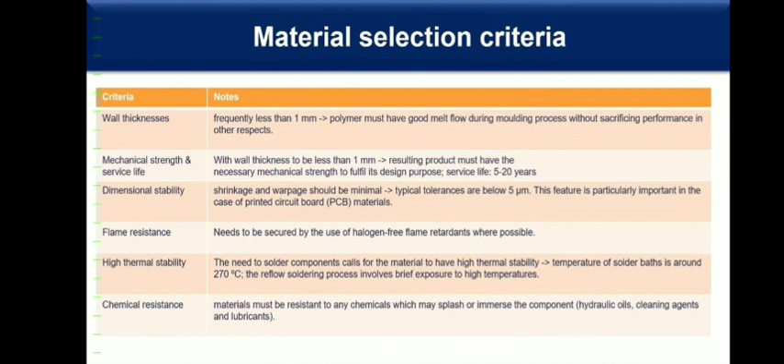Then we have high thermal stability, as already mentioned for the reflow soldering process for printed circuit boards, with temperature peaks of 270 degrees Celsius. It also needs to be resistant to any chemicals which may splash or immerse with the component, such as hydraulic fluids, cleaning agents, and lubricants.

Furthermore, there can be sliding components involved in the electrical device. If so, there should be as little dust production as possible, maintaining good tribological qualities.

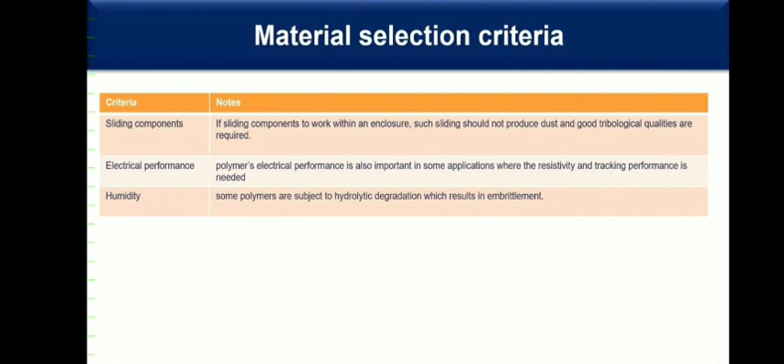Then of course there's electrical performance of the materials. Depending on the part and application, resistivity and tracking performance is needed. Also, humidity is a factor, as some polymers are subject to hydrolytic degradation, which can in the long run lead to part failure. This needs to be kept in the back of our minds.

Now let's discuss some component characteristics. When you look at electrical components, in particular enclosures, there are ingress protection numbers, the IP number. It's used to express the protection against the ingress of foreign bodies and water, depending also on the IP rating.

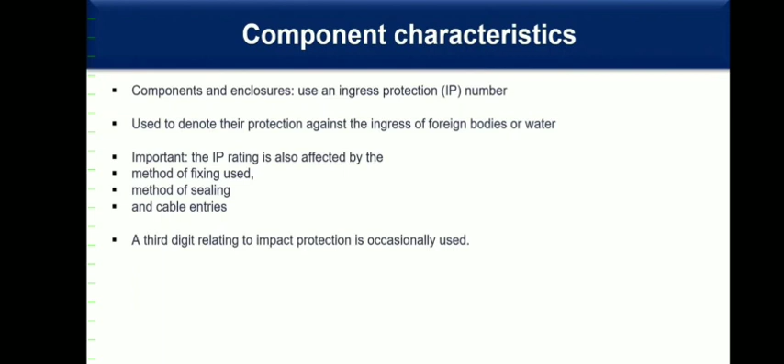Several other things are affected, for example the method of fixing used, the method of sealing, and the cable entrance into the device. Sometimes you have two digits, but sometimes a third digit is added to express impact protection. Let's have a look.

Here is a table of the different IP levels: the first digit table, and the second digit table. For example, take IP protection 66: looking at the first digit 6, that means total protection against contact and ingress of dust, and the second digit 6 means protection against high pressure water jets from any direction. This is a typical IP scenario, and you have to consider these tables for material selection.

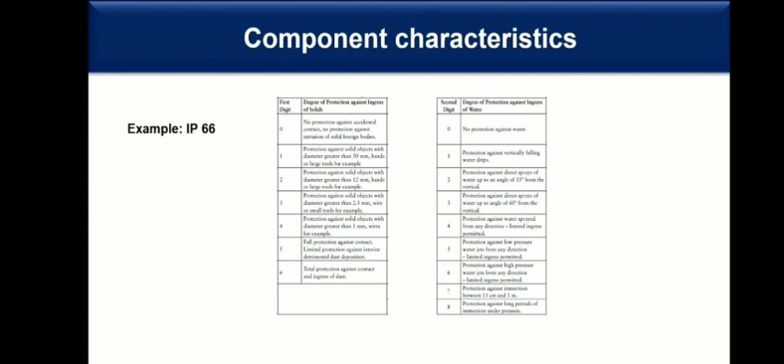Okay, let's continue with the selected materials. We start with the commodities, and here I've selected polypropylene because it's a well-known low-cost material.

We have a well-balanced relationship between toughness, stiffness, and hardness, and also some heat resistance up to 100 degrees Celsius. We have excellent resistance towards chemicals, low water absorption, and low permeability to water vapor. It's easy and flexible in processing, whether you want to mold or extrude.

Although we have a low density, this results in a variety of electrical and electronic applications. Examples include battery containers, cable retention clips, screws, nuts, and washers.

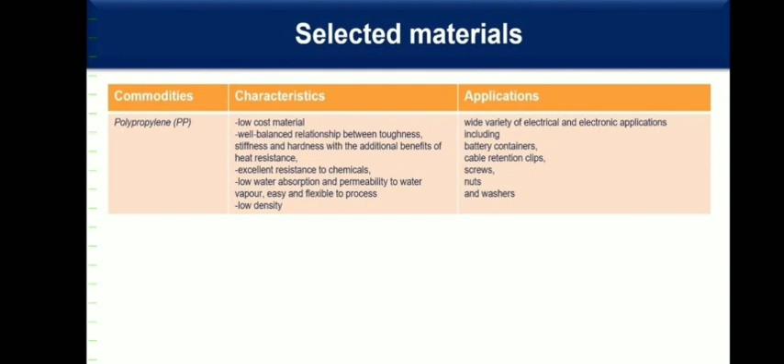Okay, let's continue with the engineering polymers, starting with ABS. Here we have good dimensional stability at both high and low temperatures. ABS can be coated with metallic finishes, for example nickel.

We have the UL94 classification ranging from HB to V0, and also excellent impact behavior. A case use example is in intricate parts, for instance.

Then we continue with polyamide or PA. It is selected for electrical components because of the good chemical, electrical, and mechanical properties of the material, combined with flexibility and relative immunity to fracture. We also have UL94V0 with the use of flame retardants, and we can withstand temperatures up to 200 degrees Celsius with heat stabilization applications.

It has a large field of applications ranging from memory connectors, input-output connectors, connector supports, board-to-board and wire-to-wire connectors, connectors in general, and also modular jacks and micro switches.

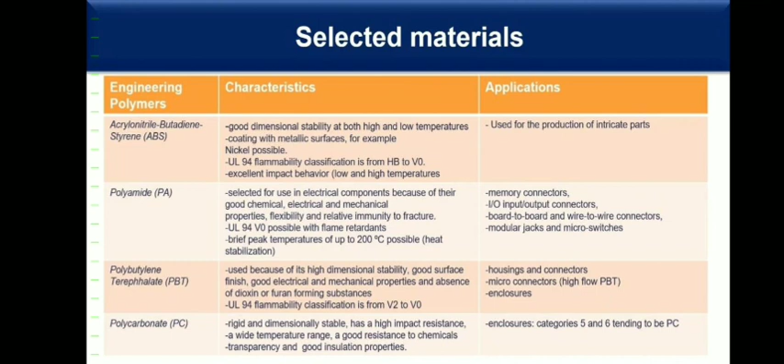Let's continue with the high performance polymers. To start with, polysulfone, an amorphous high performance polymer, which is tough, rigid, and has high strength with a high heat deflection temperature. It also has good dimensional stability with constant electrical and mechanical properties over a wide temperature range. Then we have excellent surface quality of polysulfone, which enables it to be metallized directly. Applications range from enclosures, sensors, bobbins, solenoids, connectors, and fuse boxes.

Then we have polyphenylene sulfide or PPS. It's a semi-crystalline high-performance polymer, especially known for its high heat performance together with high heat deflection temperatures, in the range of 260 degrees Celsius. We have exceptional processability with injection molding, meaning outstanding dimensional stability, in particular in injection molding, when high precision molding is needed to fulfill severe tolerances, with high chemical resistance. Replacement of high performance thermosets or metals is possible, and for applications PPS can be used for surface mounted connectors where we need this high heat deflection temperature, and also replacing conventional materials in applications such as housings of mobile phones or other information devices.

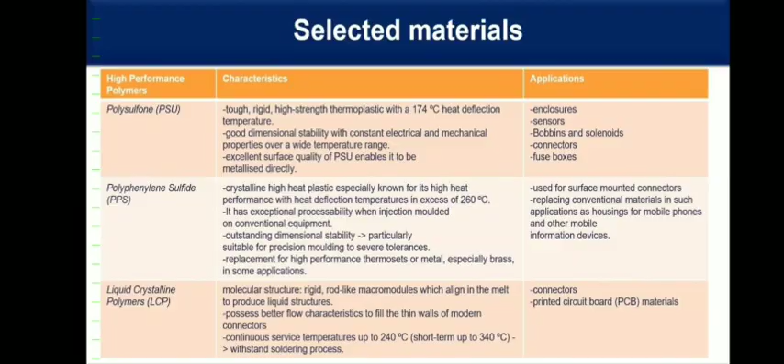Okay, let's move on to material selection for natural fiber composites.

A composite material is a combination of two materials with different chemical and physical properties. When these materials are combined, they create a better material, one that is an improvement on the base materials' individual properties and can be applied in more situations. By creating this composite material, the resulting material may be stronger or lighter, perhaps made more durable, or have better electrical conductivity.

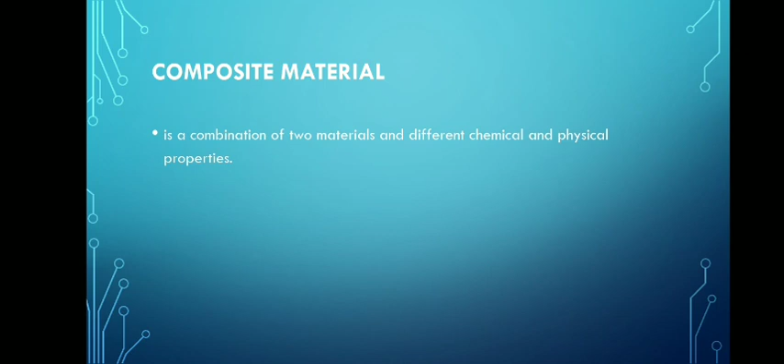A specific type of composite known as fiber reinforced polymer composites are high performance materials made from a matrix which has been reinforced with an engineered man-made or natural fiber, such as glass, carbon, or aramid. In a fiber composite, the matrix protects the fibers from damage and transfers the load between the fibers. The fiber in turn provides strength and stiffness to reinforce the matrix and resist cracks and fractures.

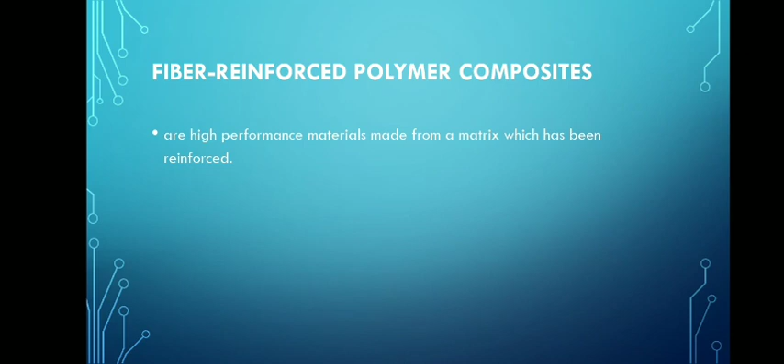Natural fiber composite is a subset of fiber reinforced composites, where the reinforcing fibers, or both the resin and fibers, are derived from renewable or natural resources such as wood or plants.

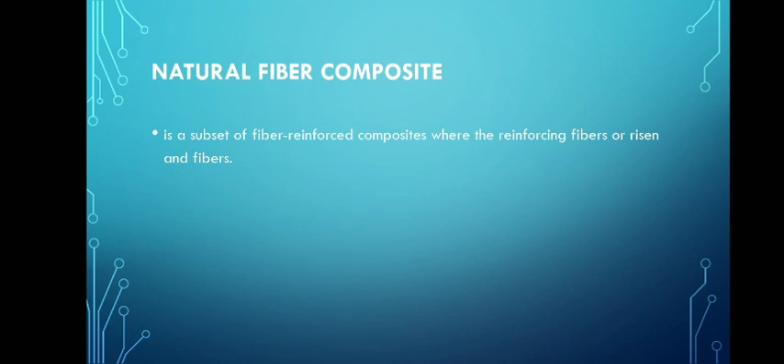The concept of composite materials dates back to 3400 BC, when the Mesopotamians glued wood strips together at different angles, creating the first plywood.

Today, composite materials make up much of the world around us. Maybe you've installed fiberglass insulation, experienced the swing of a carbon fiber golf club, or lounged in the sun on a wood composite deck. These remarkable materials have been designed and tuned to withstand our most demanding applications.

Next is material selection for components, from a concurrent engineering perspective.

An important class of material is composite materials. By composite material, we mean a man-made multi-phase material. We have met multi-phase materials previously like steel, in which ferrite and cementite are present, but we will not consider that, because ferrite and cementite both form during natural cooling of steel from the austenite phase. By man-made we mean the two phases were individually existing and then put together to form this composite material out of two phases.

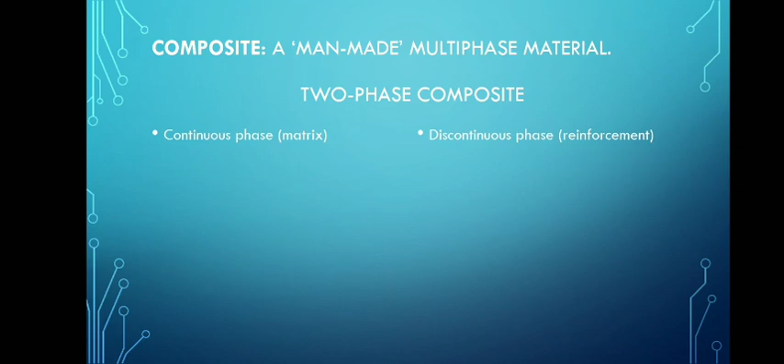Composites can be classified on the basis of the nature of the matrix. So we have polymer matrix composite, metal matrix composite, and ceramic matrix composite, depending on whether the matrix is polymer, metal, or ceramic.

An example of polymer matrix composite will be GFRP, which is short for glass fiber reinforced plastic. For example, polypropylene or epoxy with glass fibers for reinforcement. So that is glass fiber reinforced plastic, or we have CFRP, carbon fiber reinforced plastic. Many times in sports equipment like rackets, they are sold as carbon rackets, but they are actually carbon fiber reinforced plastic. Similarly, many commercial products are known to be made of fiberglass, but fiberglass is actually glass fiber reinforced plastic.

Then you have metal matrix composite. An example of a metal matrix composite, one can take aluminum as the matrix and reinforce it with its own oxide, Al2O3. So alumina is the reinforcement, and aluminum is the matrix.

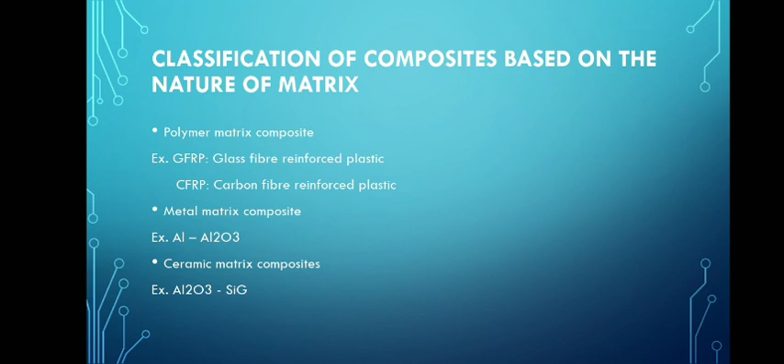Here I show you a classification scheme of composites based on shape and distribution of the reinforcing phase. The reinforcing phase can be a particle, so we call it a particle or particulate composite, or it can be a fiber, which we call a fiber composite. The reinforcing fiber can be either discontinuous or short fibers, or it can be continuous and long fibers which are aligned. The discontinuous short fiber can also be aligned or could be random. So depending on the orientation and shape of the reinforcement, we can classify the composite into different classes as shown here.

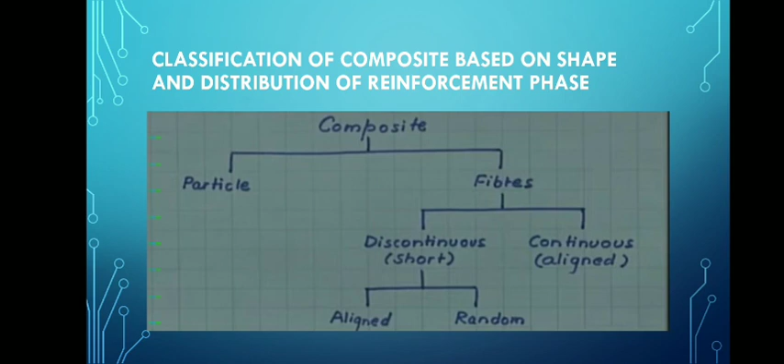Good evening, everyone. I am here to talk about design considerations. So, firstly, what is a design consideration?

Design considerations are areas that may affect the requirements, design, or operational concept of a system, and should be part of the system engineering process throughout the acquisition life cycle. Some design considerations are concepts that assist system engineering trade-offs and ought to be accommodated or applied to each system, program, or project. Others are constraints, boundaries, or limitations, with values that can sometimes be tailored or negotiated, but which in general represent fairly immovable parts of the trade space.

Many design considerations are mandated by laws, regulations, or treaties, while others are mandated by the domain or service component. These mandates should be incorporated during the requirements analysis process to achieve balance across all of the system requirements.

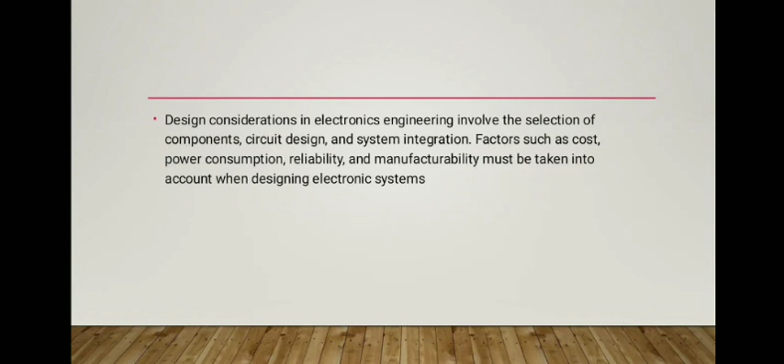Design consideration in electronics engineering involves the selection of components, circuit design, and system integration. Factors such as cost, power consumption, reliability, and manufacturability must be taken into account when designing electronic systems. It also includes circuit board layout, power regulation and noise reduction, temperature control, and component selection.

Additionally, designers must consider material compatibility, electromagnetic interference, dissipation, reliability, and durability in order to create a successful product.

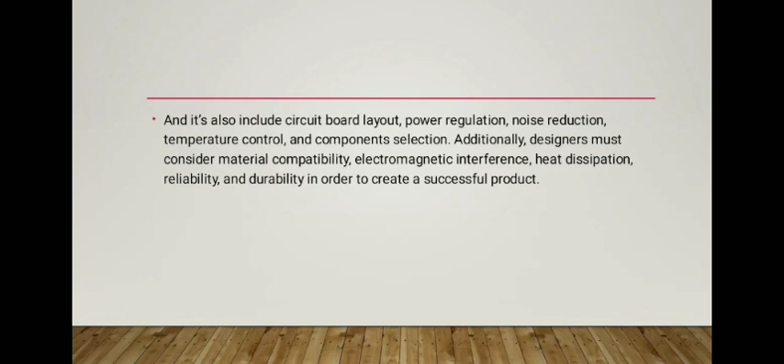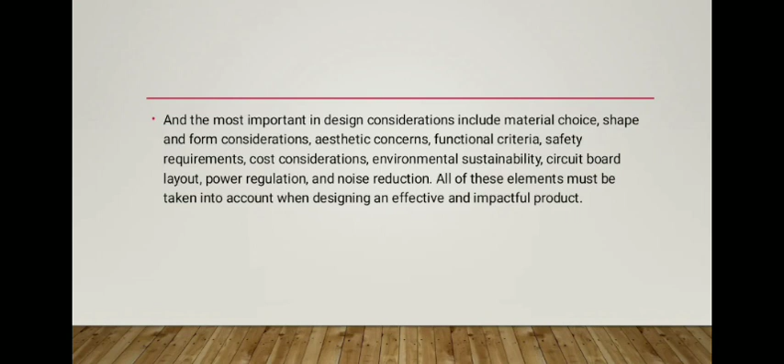The most important design considerations include material choice, shape and form consideration, aesthetic concerns, functional criteria, safety requirements, cost consideration, environmental sustainability, circuit board layout, power regulation, and noise reduction. All of these elements must be taken into account when designing an effective and impactful product.

Examples of design consideration include material choice for structural integrity and durability, shape and form consideration for aesthetics, ergonomics, and functionality, aesthetic concerns for visual appeal, and functional criteria for usability and operational performance.

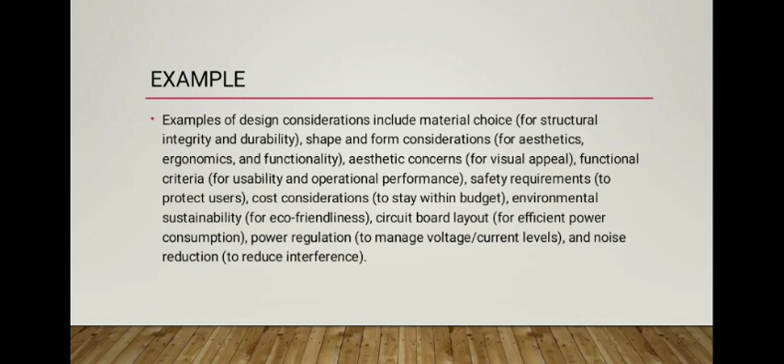Safety requirements protect users, cost consideration keeps things within budget, environmental sustainability ensures eco-friendliness, circuit board layout ensures efficient power consumption, power regulation manages voltage and current levels, and noise reduction reduces interference.